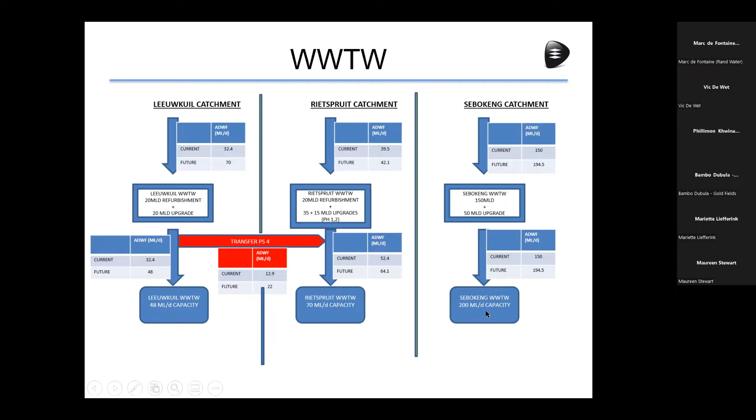Then moving on, this is just a view of the upgrades that are planned. If you look in the Leeuwkuil area, the blue lines there are the main gravity lines already designed and documentation ready to go out for tender. Then the Rietspruit catchment, the blue lines, I'll discuss the details now, are the gravity lines. The red line is a rising main, and then the pump station 41 in that area.

And then for the Leeuwkuil catchment, there are a few. Leeuwkuil catchment is very dependent on pump stations to get the sewage to the treatment works. Main pump stations pumping to the inlet works is pump station 34, which takes the sewage from this area. Pump station 2 covers this area with its pump stations, and then pump station 4, this area pumping to here. You can see pump station 4 will be the transfer pump station, transferring the sewage to this gravity line and going to the Rietspruit wastewater treatment works.

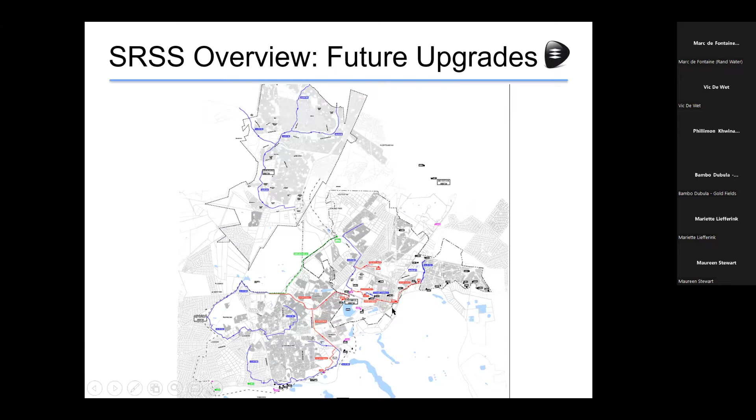Now, for the Leeuwkuil catchment, the designs for the upgrades included the new 20 megaliter per day activated sludge wastewater treatment works, a new pump station 34, which is at the works, which is a screw pump station with 3 Archimedes screws, each capable of handling 500 liters a second. So there's 2 new to 1 standby, so it will be able to handle 1,000 liters a second, looking at future development as well in that area.

Then we also did a new design for the upgrades of pump station 5, 10, 2, and 4, which are the critical pump stations. And then gravity main 4 and 12 was also identified as needing an upgrade. And then the gravity main to pump station 2, which links pump station 10 to 2, also needed an upgrade. That pipe collapsed completely. Okay, as I said, all designs are completed and design reports are in.

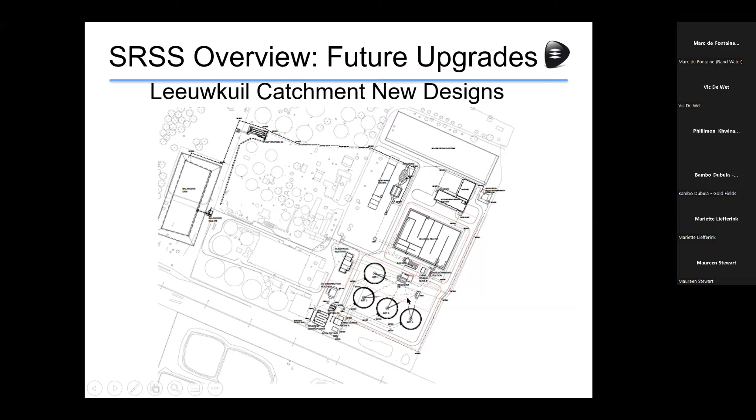Yeah, I'll go into a little bit more detail of that in the refurbishment.

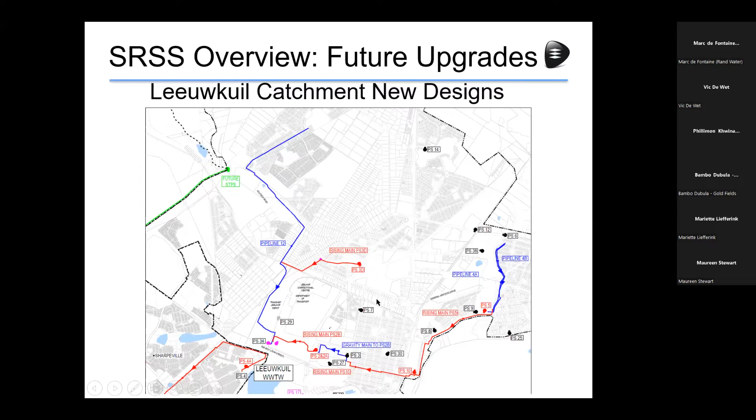Then next slide. If we look at the Rietspruit catchment, sorry, I can't see any hands. If you guys put up hands, if someone can just stop me if there's questions.

Apologies for that. Then if we look at the Rietspruit catchment, the Rietspruit catchment has a wastewater treatment works capacity upgrade of 50 megaliters planned in 2 phases, 35 and then a 15. Secondly, the existing 20 megaliter per day plant optimization design's already done. That needed another secondary settling tank, a RAS screw pump station, and a waste-activated sludge pumping system as well.

Then also pump station 41, which is the river pump station. Its rising main is also not big enough. This pump station currently is pulling a lot of resources in terms of operation and maintenance, constantly having to look at it. Documentation is in, looking to finalize the budgets and going out to tender, but this pump station will pump to the northern gravity line towards Rietspruit, which I did show in the beginning, but we can go through it again. Then there are gravity lines that need upgrading, which is gravity line number 16, 17, 19, 21, and 22.

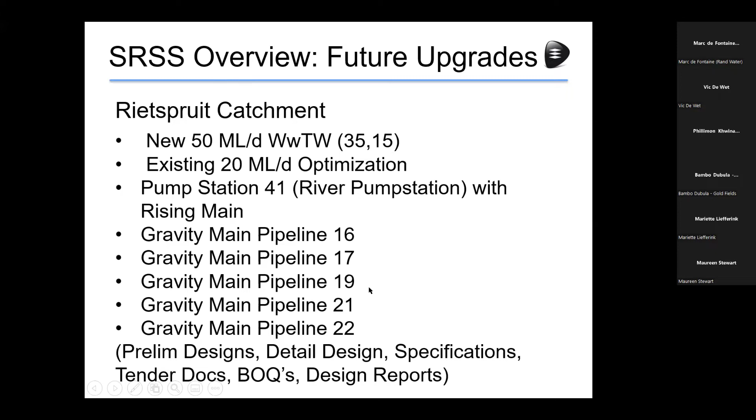If you look at these, this is the 50 megaliter wastewater treatment works for Rietspruit that we have looked at. We've got the main inlet works, which is a 70 megaliter per day inlet works, because the current inlet works we're basically going to scrap. That's a single channel, which is not very effective. So you have a single control of the main inflow coming into the works with 100% redundancy on the channels that have been designed in terms of screenings and grit removal, and then also fats, oils, and greases removal to make sure that we condition the sewage for longevity of the mechanical equipment in the rest of the plant.

We've also allowed hydraulically for primary settling tanks, but currently the characteristic sewage doesn't show that we need the PSTs. The COD load coming in is about 500 to 600 milligrams per liter, sometimes at 200 because of the dilution of the COD and the night flows. But for PSTs and effective use of them, you basically will need more digesters, which is also a cumbersome process. So you're just moving the treatment of the primary settled sludge to an additional process on the side, whilst the low COD can be effectively handled in the reactors.

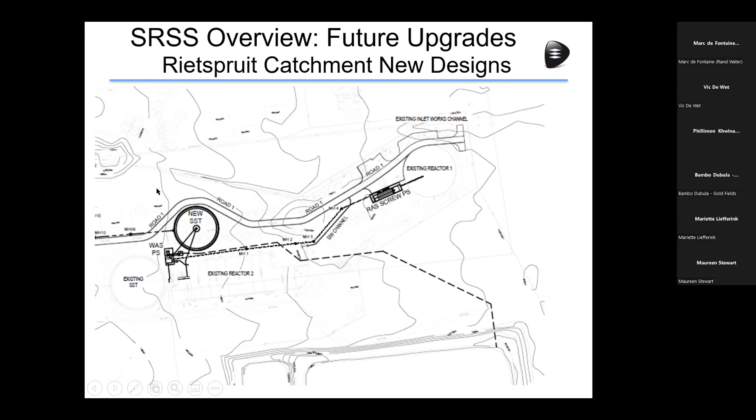Just want to see. Yeah. Then the waste activated sludge. This is the new pump station situated next to the new SST. That will pump to the sludge ponds in the beginning until the new treatment works has been constructed. That line will then be diverted. There's the box. We just connect there and we're off to the new dewatering building. Just a little bit more of a close-up of the existing works.

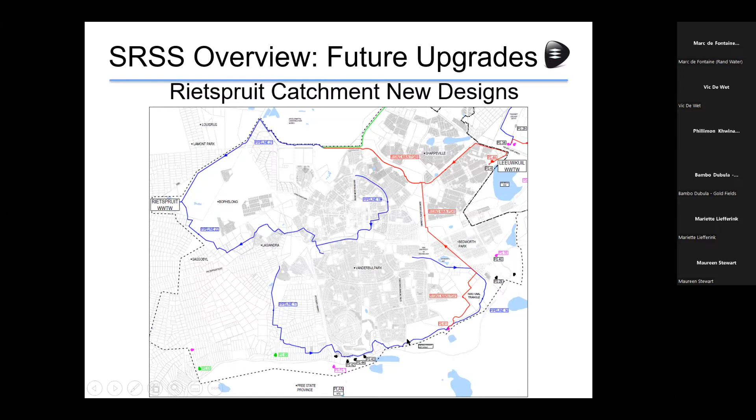Okay. As I've said, this pump station is giving a lot of problems, and we want to get that going as soon as possible. Although it is still operational, there's a lot of operational maintenance required.

Then looking at the Sebokeng catchment, looking at pipelines B, D, E, F, and G, we've done the designs ready for the upgrades. This is the Sebokeng wastewater treatment works. Pipeline F is what's going to drain the sewage from Savannah City here in the north. Currently a problem, we need to refurbish that line as soon as possible. It has been moved forward due to that.

Then also apparently we're now looking at a future 14,000 units coming into pipeline D. That design needs to be re-looked at. It was a 1 meter diameter gravity sewer. It's now going to go up to maybe a 1.2, but we're assessing again because that new development wasn't on the cards at the time of the design. So we're re-looking at that pipeline. So this is pipeline D, E, G, and F. This pipeline is another consultant, it is not part, but we are making sure that we keep everything in sequence. We will look at that.

Then this is pipeline B, also coming to the Sebokeng wastewater treatment works. The Sebokeng wastewater treatment works is done by Zutari. I did mention at the start that the Sebokeng wastewater treatment works recently commissioned module 6. It's operational. There's a few things that still have to be looked at in terms of modules 3, 4, and 5. They also need to be fully functional, and refurbishment budgets are being made available to sort that out. And then the upgrade of module 7, which will render it a 200 megaliter wastewater treatment works plant.

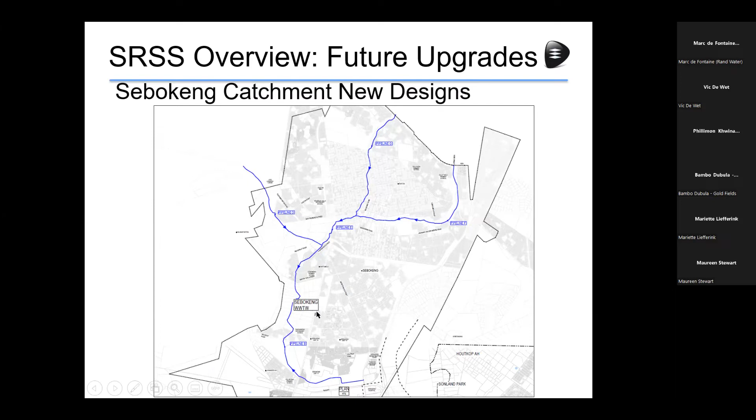Then, as I've said, Zutari just explained this one, modules 6 and 7. Then Rasamati engineers are looking at the Rietspruit outfall sewer, the Savannah City to Sebokeng, which will go into line F. Then the Eastern Diversion Sewer, that is the new river pump station. It's a small pump station that is done by Rasamati. It's situated basically south, close to the river. That's pump station 1. It's not too big, but that will pump to pump station 4, not to the Leeuwkuil wastewater treatment works. It must end up at Rietspruit.

Just to show you, I'm going to go out of the presentation now, just to show you the typical layout of the new pump stations. That is a screenshot of that. I'm just going to go out quickly. Can you see that?

Yes, thank you. Okay, this is still looking at these. That's not an artifact. It's the ventilation pipes for the emergency overflow tank, which gives us, at peak dry, the average dry weather flow, 4 hours of storage to react to any issues in the pump station.

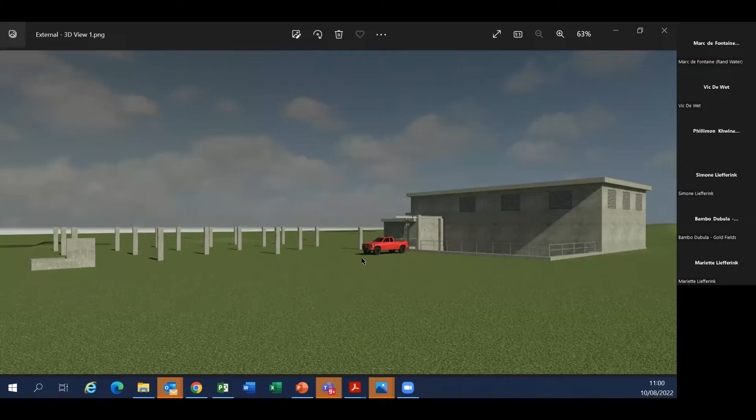Then, just want to go, just a typical view, bragging a little bit, but not too much. The pump stations that have been designed are a full fortress pump station, 30 MPa concrete. The doors are 60 MPa. They're concrete doors, sliding doors that open on a slide to the left and the right. Even the pedestrian entrance is also one of those concrete doors. So if you try and get in there with a jackhammer, you're going to make a small hole, you're going to be busy for about a week just to open up.

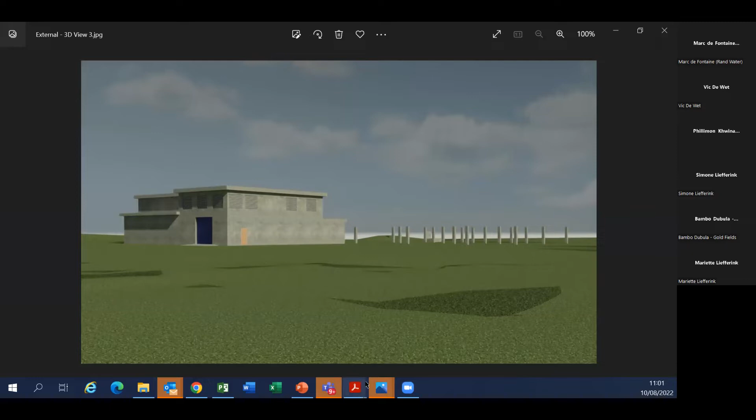Sorry, Vic, could I just ask a question about this? What is the cost of the civil engineering and the construction, excluding the cost of the actual pump station, for this, per pump station, roughly?

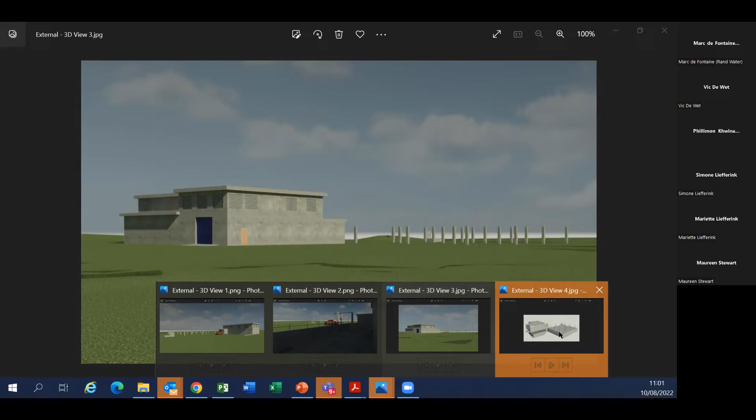Sorry, is it Maureen? Yes, it's Maureen. Maureen, can I just say something? I think we might run short of time. Can't you finish presenting, then we do all the questions afterwards so that we save time for the many other items which you have on the agenda, if possible? Okay, Maureen. Okay. I will be getting to the cost just after this. No problem. Thank you. Pleasure.

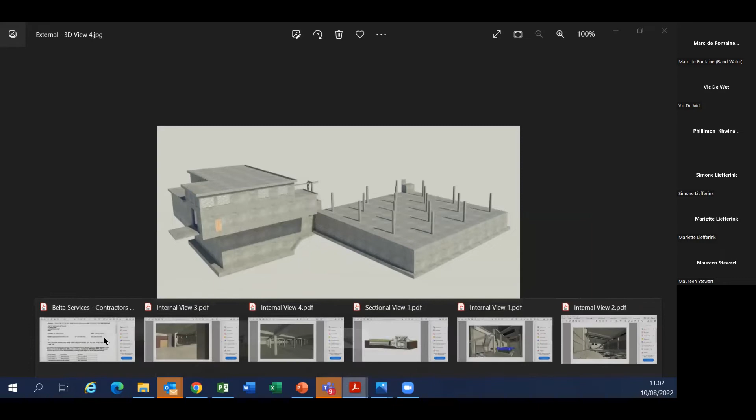Also, just to show better, this is the underground sump, and this is the emergency overflow. We don't want an open dam. It creates a lot of nuisance in the areas where it sits. Then just want to go through these. I'll go a bit faster. This is just the inside. That's the gantry crane beam to be able to remove the pumps and valves and whatever. This is the MCC entrance. This is the emergency overflow pond at the side.

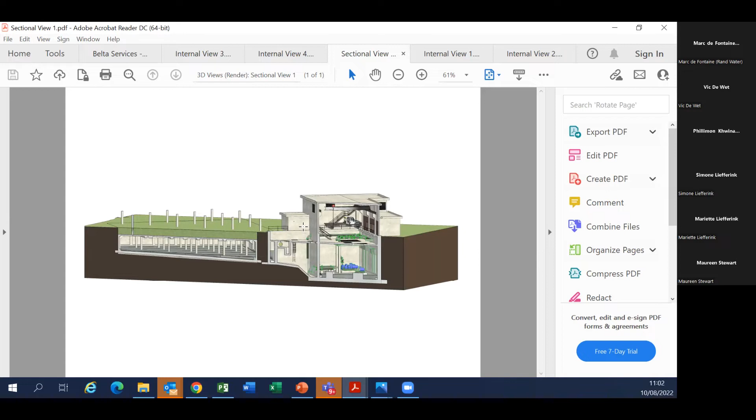That's an overview. The truck comes in there, loads up. We've got our 2 wet wells. If there's a problem in one, we can operate in the other and do maintenance. We also have pumps installed on site that can empty the one sump into the other. Any overflow into this automatically gravitates back as the pump starts operating. That's your main pumps section. We've got odor control here, and we've got your ventilation somewhere else.

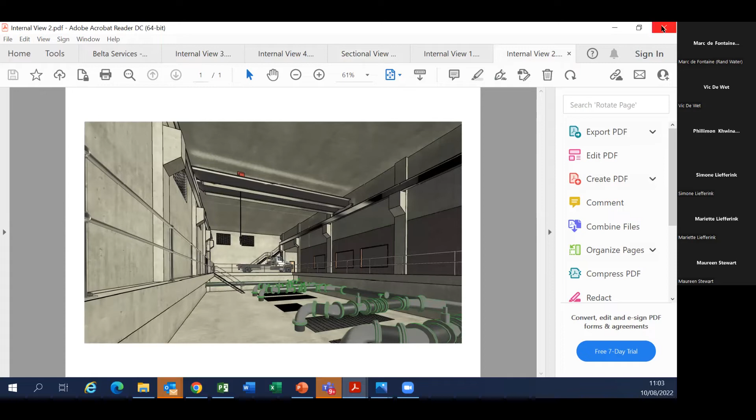Then just the bottom, the pumps, and this is the manifold going to the top and the service area, and there is also a toilet and an office in there. Okay, then I'm just going to go back to the presentation. Give me a second. There. Excuse me.

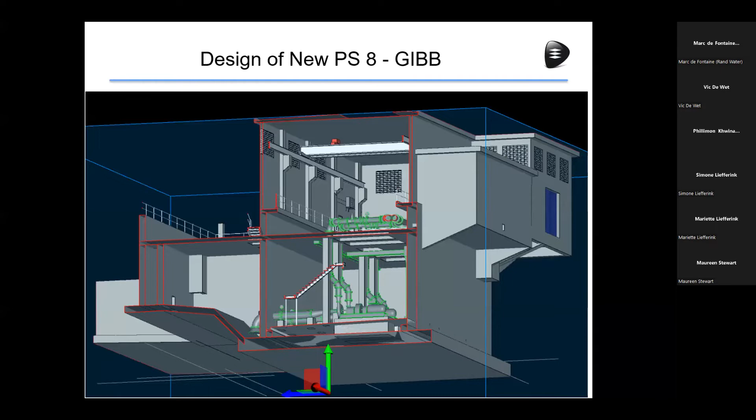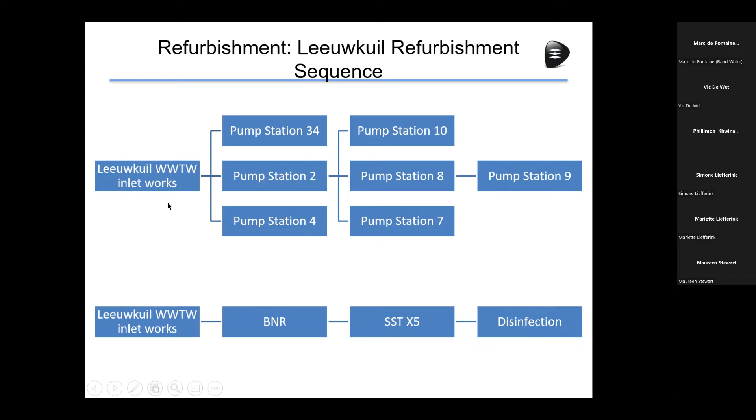The approach that was followed is basically from the inlet works to the pump stations, which is the conveyance system, and then from the inlet works parallel to that into the wastewater treatment works. Main pump stations going to the Leeuwkuil wastewater treatment works are 34, 2, and 4, and then pumping into 2 is 10, 8, 7, and then 9 pumps into 8. So from the bottom up, it doesn't help to repair this. It will just pump to here and then stand next to the R59 and the abattoir, and the sewage will lie there. So we need to start from the bottom up.

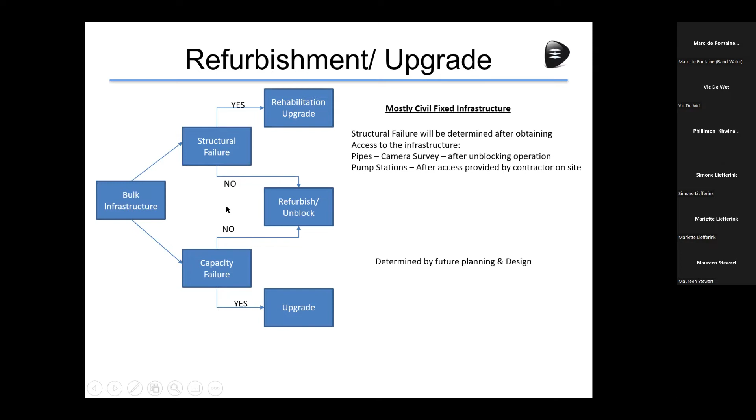Just a quick diagram. If there's structural failure, we need to do a rehabilitation upgrade. If there's no structural failure, we look at just refurbishment. If there's a capacity failure, then we need to do an upgrade, not just refurbishment. So just replacing like for like, if it doesn't need an upgrade, is basically what it comes down to.

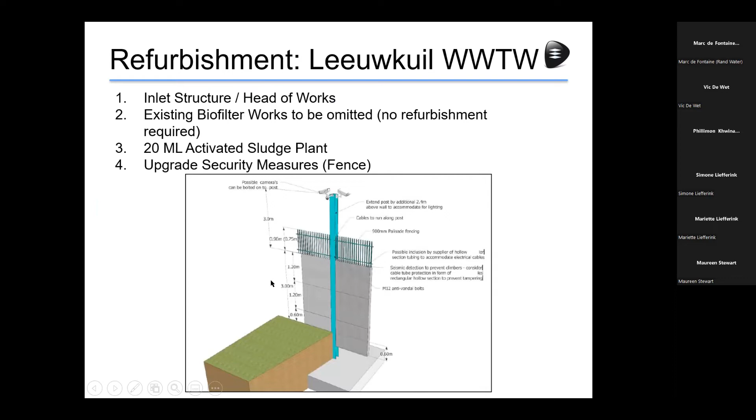Then this is the Leeuwkuil wastewater treatment works. The inlet works needs to be done first. We're not going to do refurbishment on the existing biofilter system, although we're going to make sure that it does some partial treatment during the time of the upgrades. Then the 20 megaliter wastewater treatment works activated sludge plant must be refurbished. And a main concern is the security. We need to look at security, else it will render the works dysfunctional anyway.

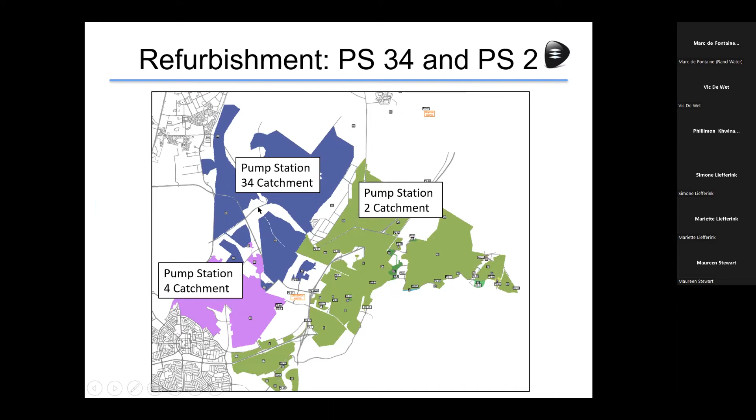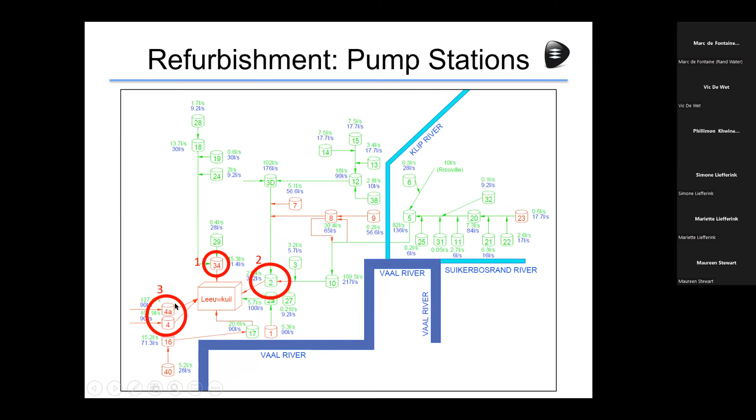Wastewater treatment works here, just to show you the catchment. Pump station 2 doing the green area, pump station 4 the purple, and pump station 34 the blue. Pump station 2 there, this is a diagrammatical layout, and pump station 4 there, just to show you where it sits, and then the proper layout. Pump station 34 is the screw pump station that I showed you on the grounds, which takes this main line and puts it into the inlet works.

Pump station 2 sitting here to the inlet works, and then pump station 10 pumping to here with a gravity line to pump station 2. This line has completely collapsed and is currently out for award. The construction start is imminent.

Then pump station 2's rising main is required, and then for the awards for pump station 2, 10, 8, and 9, I've seen the letters, so that should be starting shortly.

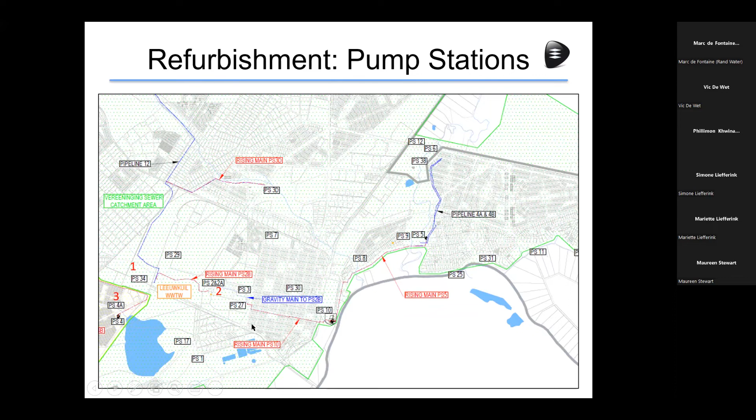What we are concentrating on, but also the rest, is to try and get the refurbishment done. So we are looking at Leeuwkuil area; these were the immediate actions to save money in terms of level control. So just to get pump stations going and making sure that we don't have to have trucks running and waste money for it. These are the budgets required for the refurbishment to render the whole system functional again.

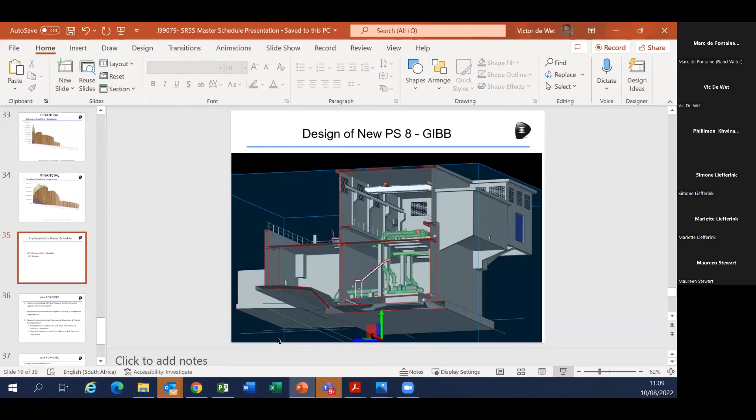Now, for the Leeuwkuil catchment, we've identified what needs to happen first to make the best impact and maximize the stopping of the pollution. So, as I've said, we're looking at the inlet works first. There's the inlet works. It needs a wash water pump station, and at Leeuwkuil, there's no evidence of a wash water pump station. Your mechanical equipment's Achilles heel sits in the wash water pump station because it must be cleaned with nozzles at high pressure.

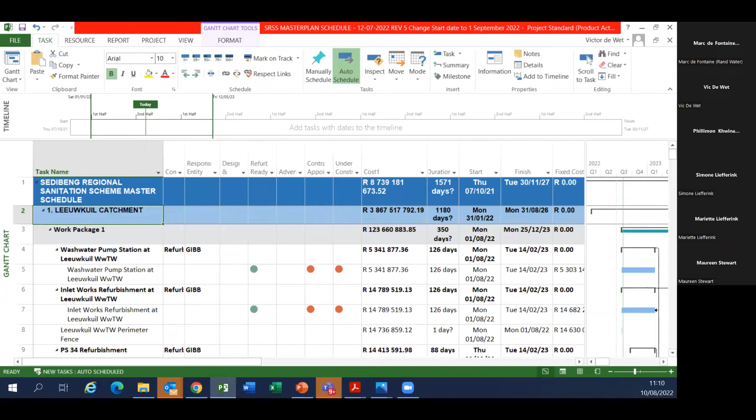And that needs to have backup systems in place. So that's the first item, together with the inlet works, which is that item. Then we've inserted a perimeter fence because if our power cables are stolen, nothing will work. Then the existing pump station 34, which is not pumping at all at the moment, we're looking at that refurbishment to at least get the sewage flowing.

And then its balancing dam to sort out any downtime and receive the wastewater so that pipeline 12 doesn't block up. Then we need to start with the construction of the new screw pump station, because that pump station is just a hole in the ground with a few pumps on it, and it's not going to last. We've also put in a rock catcher to make sure that it doesn't reach the pumps and we take them out effectively. But that rock catcher will be retrofitted so that it can fit into the new pump station as well. And then your pipeline 12 over there.

So I'm not going to hop back to the system, but if you can remember on Leeuwkuil, the gravity line 12 coming from the northwest down, that whole system is covered in this first section so that we can get the sewage to the treatment works. The next one looks at pump station 2 to get the sewage from the east. Now, firstly, we have to make sure that there's a rising main to pump into, and then refurbish pump station 2. So these two work hand in hand.

And then also the gravity line from pump station 8, from pump station 10, the discharge to pump station 2 coming from the east. Once that's effective, pump station 2 won't cope. Pump station 2 currently has a 30 kilowatt pump in it. It should have 470 kilowatts in.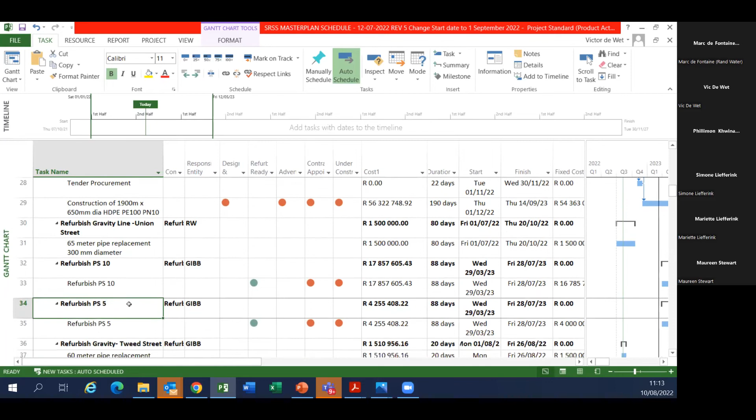Pump station 10 and 5 can then be refurbished or be commissioned. The sequence talks more to the commissioning. A lot of these things can be done in parallel, but the commissioning needs to be done in the right sequence. Then there's a pipeline 6, which is pump station 8's rising main, which is also collapsed. Emfuleni has got a big budget for that, just to replace it by putting a pipeline inside the steel pipe that's collapsed over the length to sort that out.

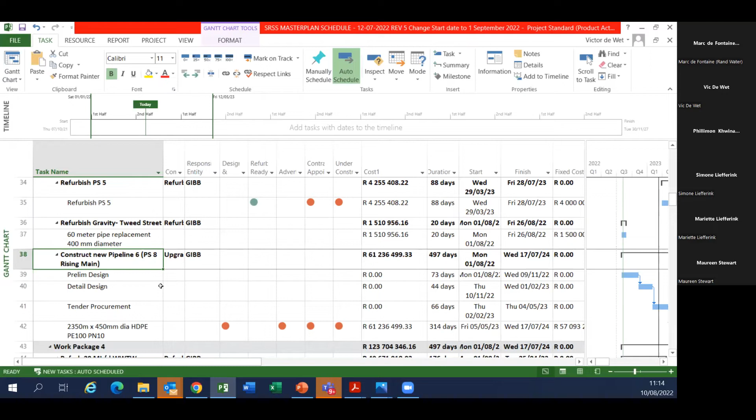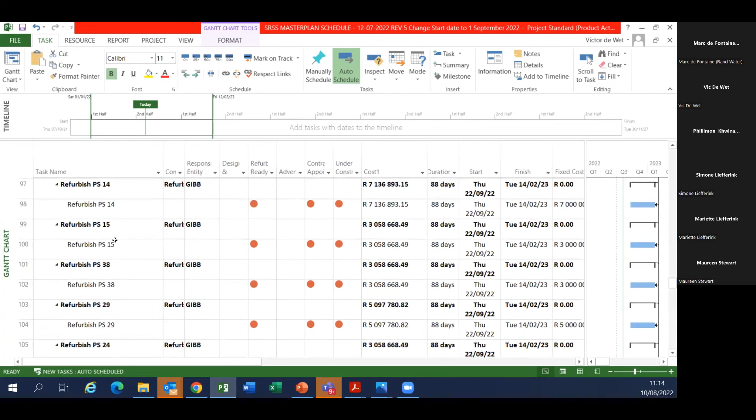Then we're looking at refurbishment of pumps of the 20 megaliter wastewater treatment works at Leeuwkuil to make that efficient or effective, and then the refurbishment of pump station 8 and pump station 4. And then 9, and all the pump stations will be looked at. Now I just want to get to the upgrade. There's a lot of pump stations. There's 43 pump stations in Leeuwkuil itself.

Now, just to give you an idea of the cost of this, a new wastewater treatment works, kind of sit around about that. Maureen, to answer you, pump station 2 will have a capacity of 520 liters per second, head of 24.7 meters static head. Just the pump station was going to cost 220 million.

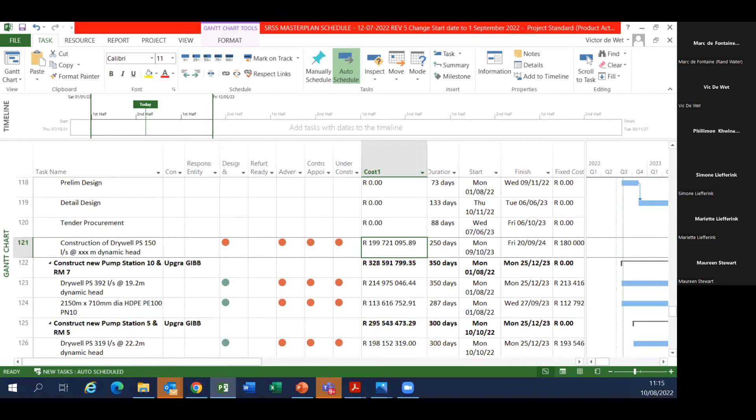Looking at pump station 8, new pump station, construct new pump station 10 and the rising main. Those are both included, because you will remember that these rising mains are included at the top, needed for refurbishment because those lines have collapsed and we don't want to put the old lines back because we need the new lines. Then also, if you look at pump station 5, that's the cost of that. That's the pump station and that's the rising main.

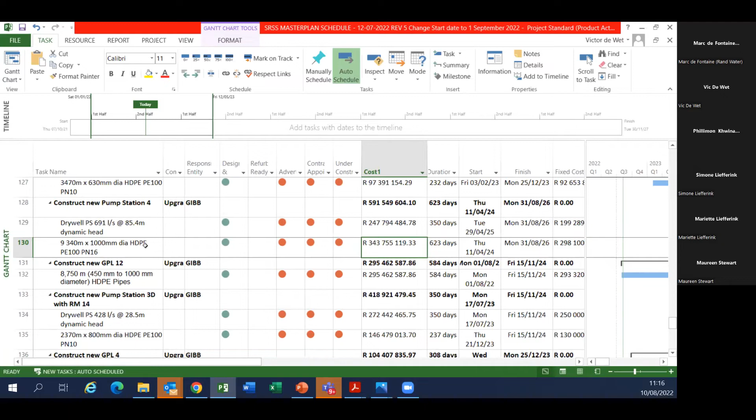Again, pump station 4, that's the transfer pump station. The rising main is quite a long rising main over that distance. It is 1,000 millimeter, a 1 meter diameter HDPE PN16 pipeline. Then what makes it so expensive is the dolomitic areas. We need to make sure that the pipes allow for those areas where the sinkholes can take place. Then basically also included, that's now for all the upgrades which we have discussed.

We've also got biosolids handling contracts running at the moment, and cleaning and unblocking of pipelines. Then there's a few outstanding items on the environmental impact assessment, just to show you this is what it covers and the timeframes of it. I'm just going to not go into that. Then there's outstanding designs for secondary and tertiary gravity lines if required. We just need to check them, but the main system has been looked at. SRSS, this is the design itself, not going into that.

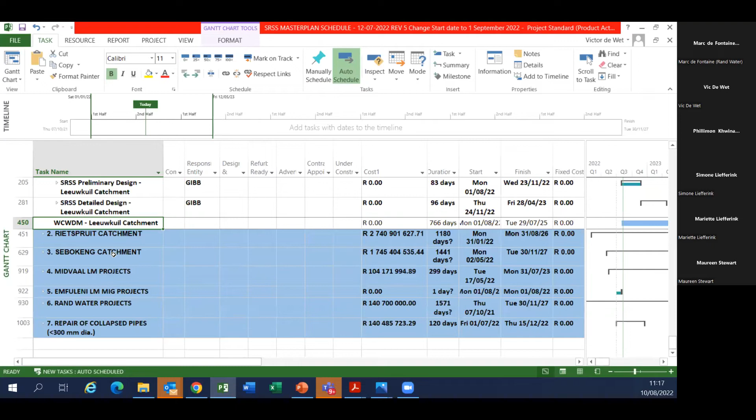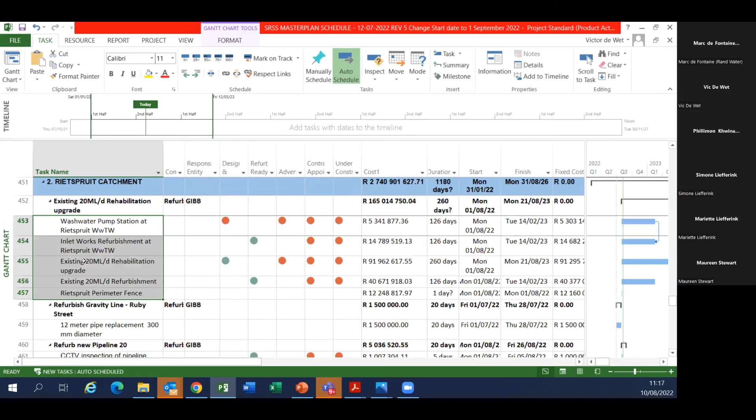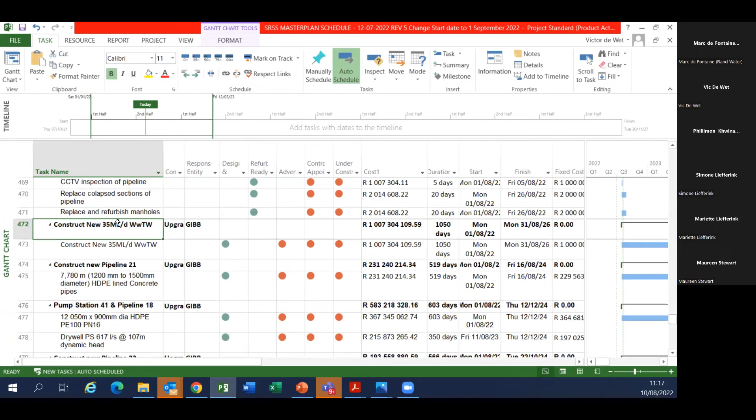And then there's a water conservation, water demand management program that is also looked at. Then on the same principle, Rietspruit also, just running past that as well. That's the rehabilitation of the treatment works. That's the inlet works and perimeter fence. Then there's the main pipelines that need to be refurbished to open up. And then the upgrades need to start ASAP because the works is under capacity. Looking at the upgrade of that, and then the lines that I've shown you, including pump station 41. Also EIA issues, biosolids handling, the same issues there, nothing new on there.

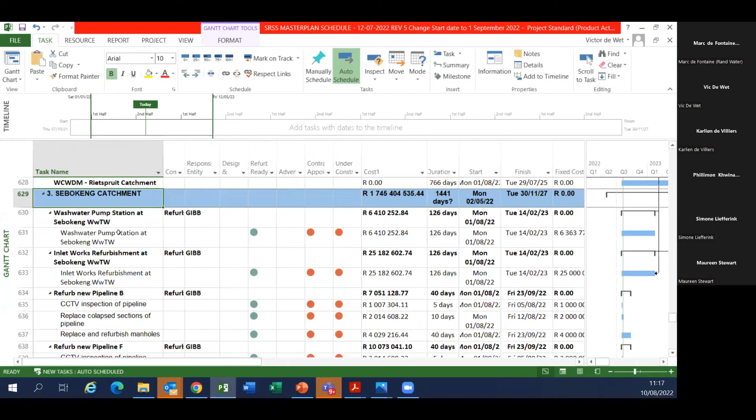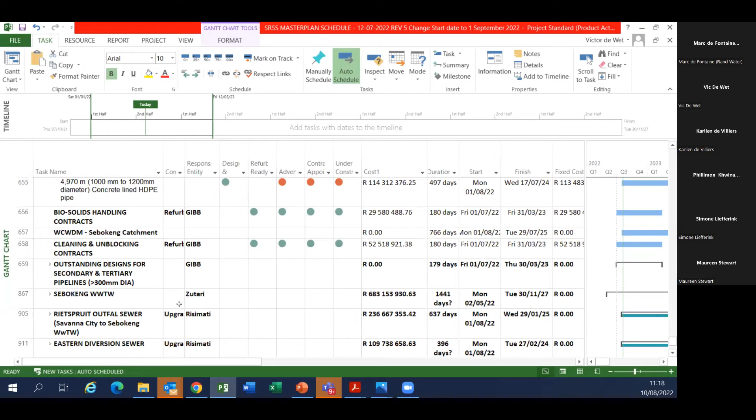Then Sebokeng catchment also needs to look at the inlet works, very important, and then the gravity lines to it, refurbishment, and then the upgrades, also biosolids handling and so on. Cleaning, upgrading. Then there's the Risimati 2 projects that I've spoken about, and the Sebokeng Zutari project for the treatment works is also in here, looking at the dates there. Then there's also what we've put in here, 2 Midvaal projects, which is the current Rothdene rising main, which is almost completed. There's a few things still to be done. Then the Meyerton wastewater treatment works upgrade that must be restarted.

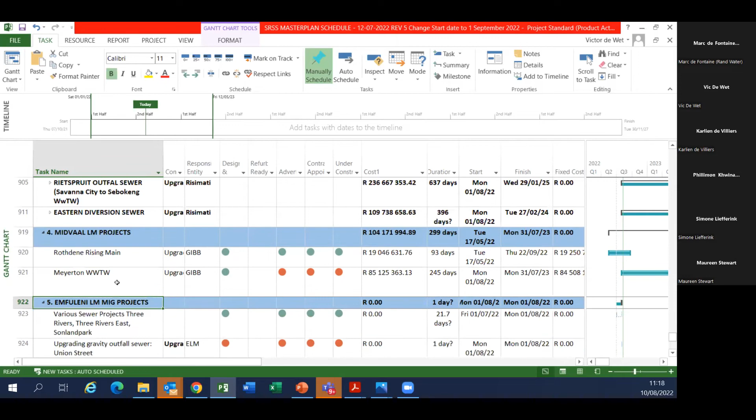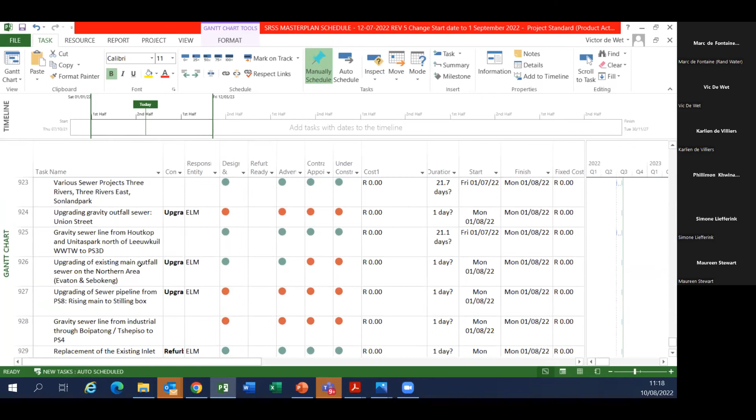Then what we've also got in here is Emfuleni MIG projects that have been coincided. The budgets are 0 here because some of them are included in the top, so we must still just sort that out so we don't take the other budgets.

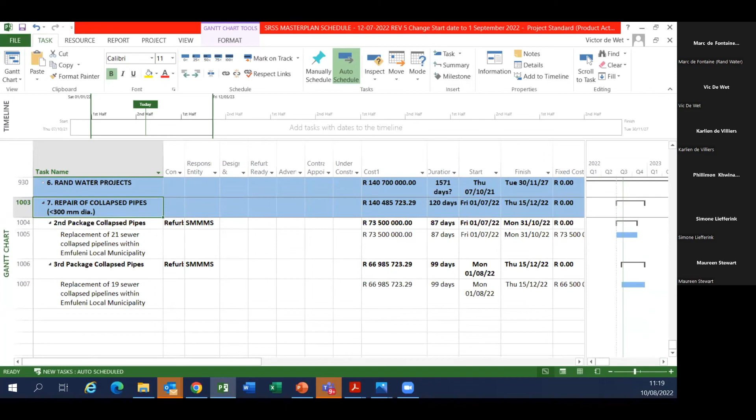Then going back to the presentation, I think we're done now. Just want to see the way forward. Basically, we are busy with this, but the actions have been identified as critical actions: refurbishment and upgrade items immediately, approval and availability of budgets according to the program requirements. To make a difference, we must try and get the budgets according to the program and not the other way around, reshuffle the program to fit the budgets, because it's going to be difficult to meet the non-pollution parameter that we're aiming at.

Then the appointment, this has been done. There are mechanical and electrical contractors that have been appointed. I've just looked at the appointment letters. They are busy to look at the main pump stations. Then aggressive mobilization of contractors, site personnel, Rand Water, Emfuleni, and DWS support teams. Required resources inclusive of equipment, tools, operation and maintenance teams, and then effective O&M communication, reporting, and feedback is required.

And that is it. Thank you very much. Any questions? All right, thank you very much. A very detailed presentation. We can take questions and summarize our questions, because after this we've got another presentation, on the charger system, which we have to go through quickly. So we can take questions so that we can move forward.